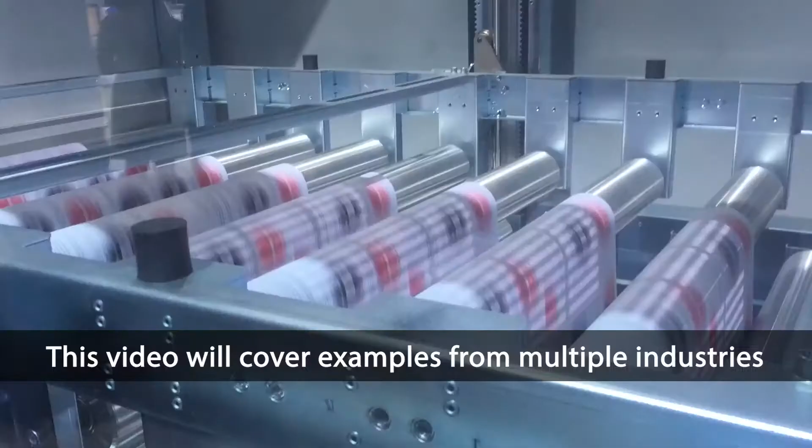This video focuses specifically on the second method, changing the process, and how you can use this method to reduce or eliminate hazardous chemicals. In this video, we are going to look at a number of examples from different industries and how they change their process to reduce hazardous materials. Although these examples are tied to specific industries, we would encourage you to watch the entire video, as the examples might give you a similar idea for a waste reduction project at your facility.

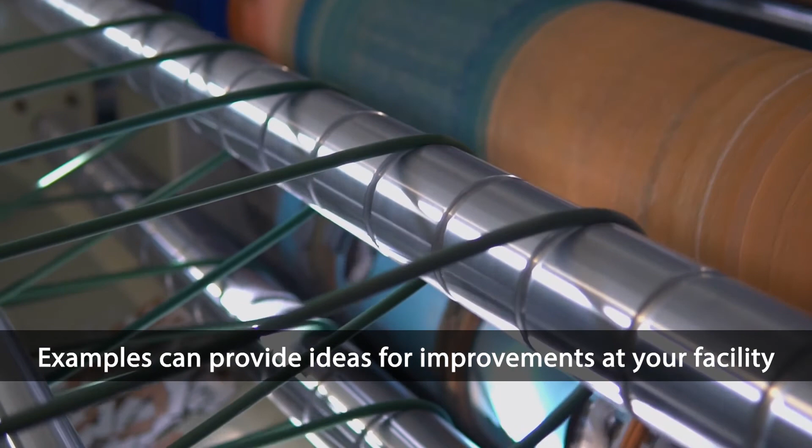Examples in this video include the following: two from the painting and coating industry, one about training and another about standardizing operations, an example from the printing industry where a facility moved to a heat press system, and finally an example about chemical neutralization at a water treatment facility. Alright, let's take a look at our first example.

Many companies with painting and coating operations have already begun using high-volume, low-pressure, or HVLP paint guns. This change improves paint transfer efficiency, so more of the coatings end up on the product. However, not all companies train their staff on how to properly use the HVLP paint guns. Let's take a look at how this can translate into savings.

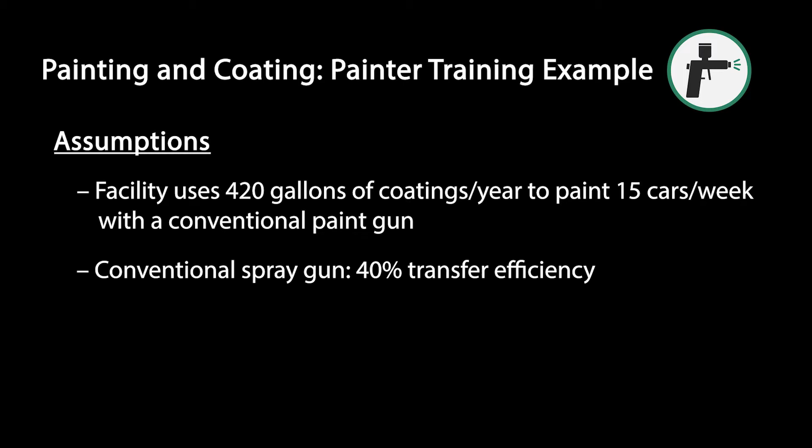In this example, a facility uses 420 gallons per year of coatings to spray approximately 15 cars per week using a conventional spray gun. A conventional spray gun has a typical transfer efficiency of 40%. The company decides to switch to HVLP spray guns, which increases the transfer efficiency from 40 to 49%.

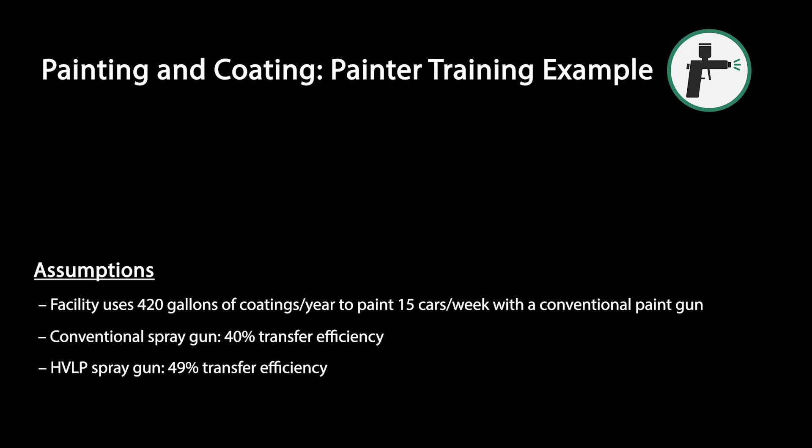First, we'll move our assumptions to the bottom of the screen. As we work through these calculations, feel free to pause the video as needed to make sure you understand them. You may even want to get out a pen and paper and run through the numbers yourself. If we multiply 420 gallons used per year by the 40% transfer efficiency, we see that only 168 of the 420 gallons is actually transferred and ends up on the cars.

Assuming then that 168 gallons is what is needed to paint the cars, we next want to determine how many gallons we would need if we used the HVLP paint gun. We'll use the same equation, except now our transfer efficiency is 49%, and we know how much paint transfers to the cars, 168 gallons. If we divide both sides by 49%, or 0.49, we find that only 343 gallons are needed with an HVLP paint gun. That's a savings of 77 gallons per year. At a cost of $90 per gallon, this represents an annual cost savings of $6,930.

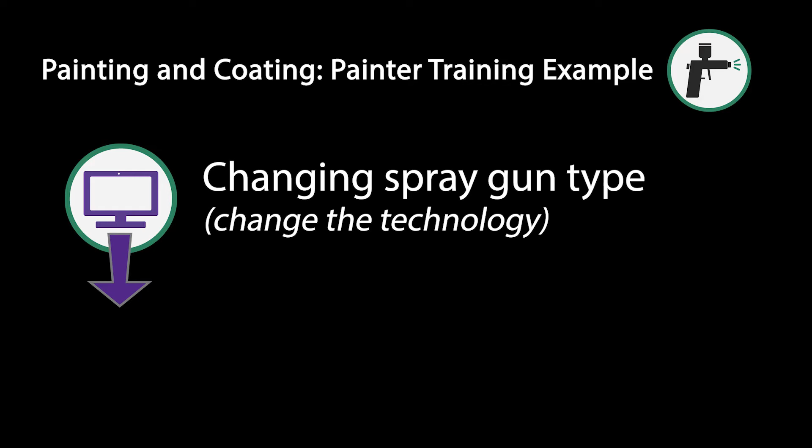Now, changing out the type of paint guns was an example of how we can change the technology. The facility decides to take this project a step further and change the process by training its workers on how to properly use the new HVLP spray guns, which further improves the transfer efficiency to 61%. We'll add that to our list of assumptions.

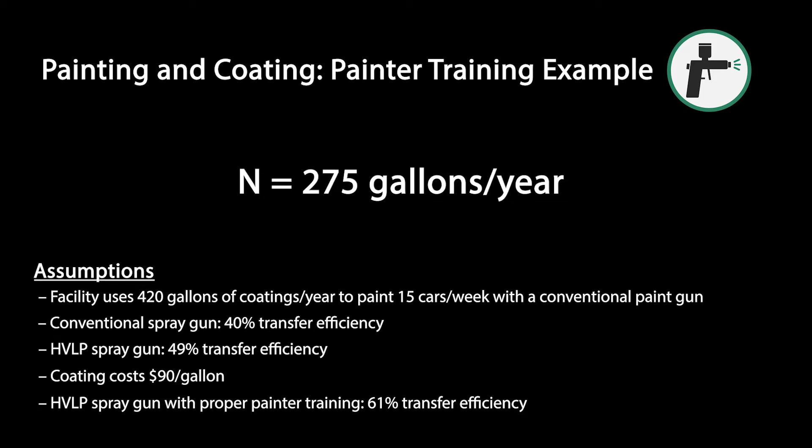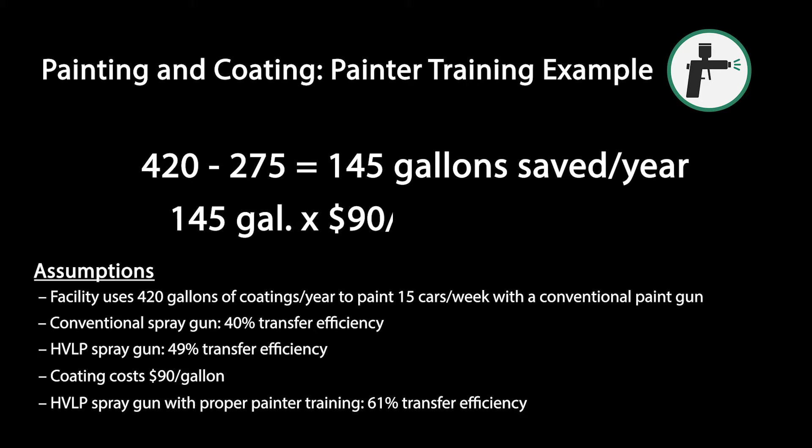Using the same method and equations just shown with the conventional and HVLP spray guns, we find the facility now only needs 275 gallons per year. This ends up being a total savings compared to the conventional gun of 145 gallons of coatings and $13,050 per year. This is a great example of how a facility can do more than just one of the waste reduction methods we discussed earlier. Here, we combine changing the technology with changing the process to achieve significant savings. This example also shows how businesses can continue to make step-by-step improvements to their operations.

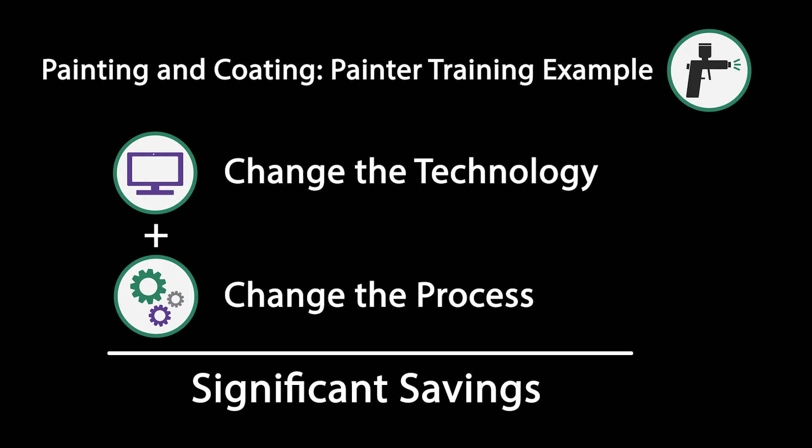Here's another example from the painting and coating industry. This facility had a pollution prevention intern assist with identifying opportunities for waste reduction. This intern began researching the company's painting operation, which is used to paint approximately 200 modular buildings per year. Each building requires 2 to 3 coatings, which includes a primer, intermediate, and final cover.

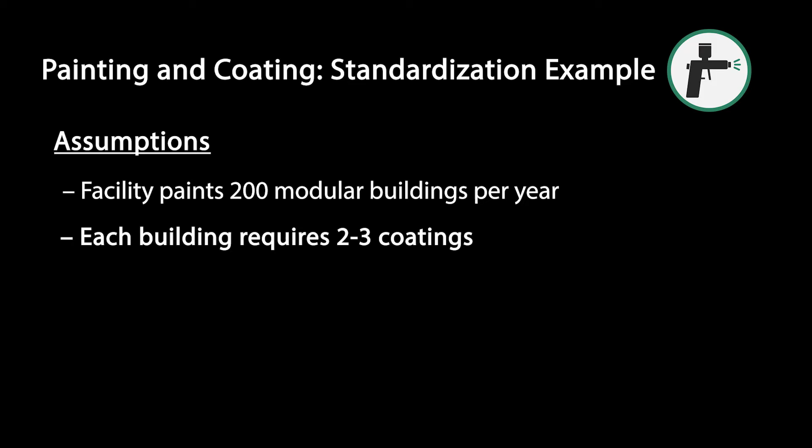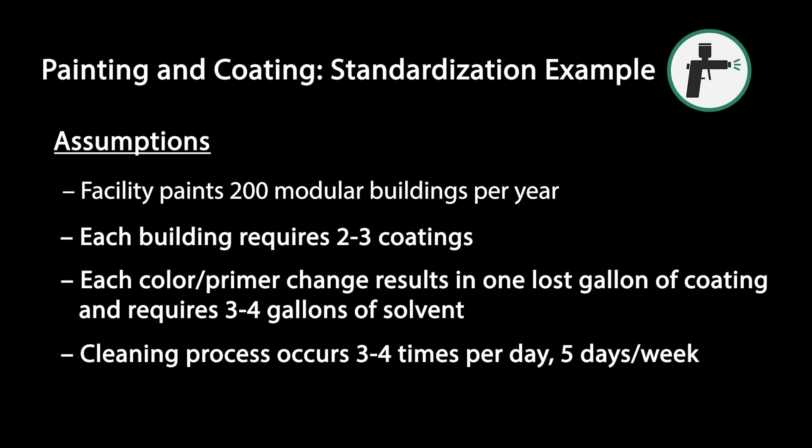Each time the paint lines were cleaned out for a color or primer change, approximately 1 gallon of coating was lost, while 3 to 4 gallons of solvent were required to clean the paint lines and guns. This cleaning process was occurring 3 to 4 times per day, 5 days per week. By standardizing the process and using primarily the same type of primer for each job, rather than giving clients the option, the intern found it was possible to save 1 gallon of paint and 3 to 4 gallons of solvent per building.

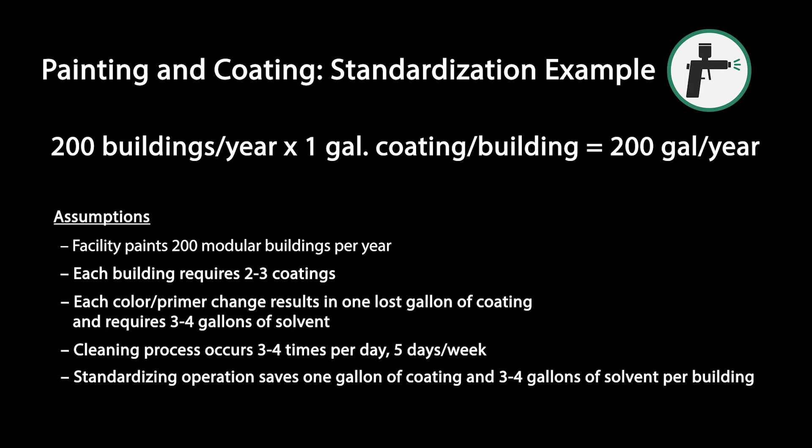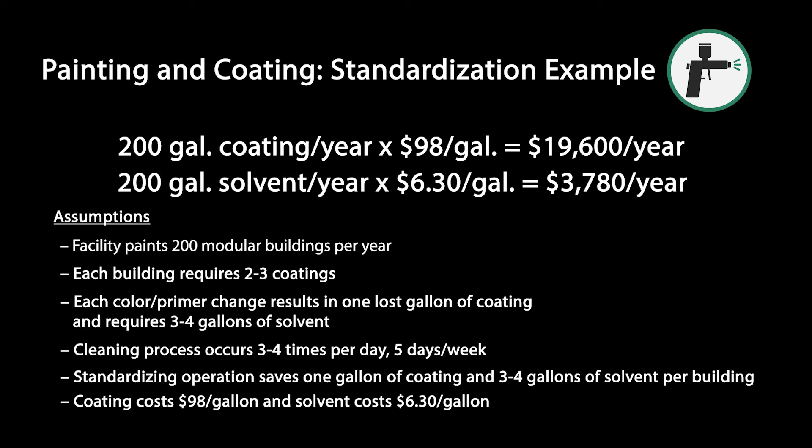This process change resulted in an annual reduction of 200 gallons of carbozinc paint and approximately 600 gallons of methyl ethyl ketone solvent. At a cost of $98 per gallon for the primer, up to $19,600 in annual savings can be realized in primer purchasing costs and $3,800 in solvent costs. It's important to note this does not include additional labor and operational savings from reducing the number of line changes.

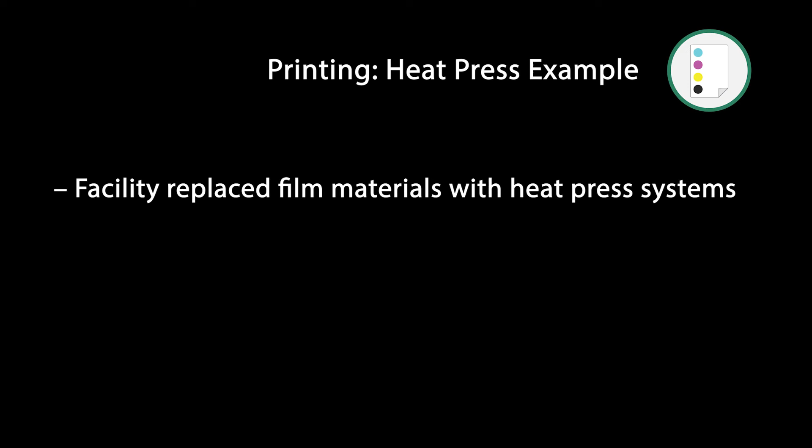A printing company was able to reduce its waste and solvent use by changing the process. Rather than use traditional, non-recyclable film materials, the facility now operates fully on heat press systems that use 100% recyclable aluminum plates. In addition to the waste reduction associated with this process change, material costs have also been reduced. The purchase of film material had cost the facility approximately $90,000 per year.

Since moving to the heat press systems, silver waste has been completely removed from the facility, and the new printing technologies have significantly reduced solvent use. This has had a positive impact on the company's purchasing cost and has also reduced the amount of hazardous waste requiring disposal.

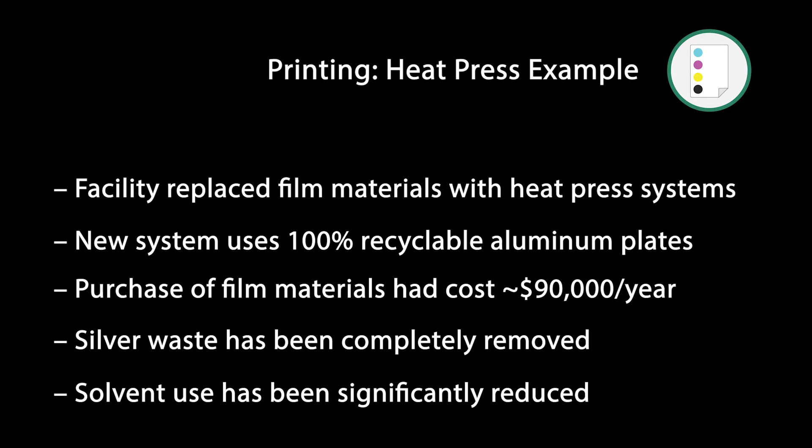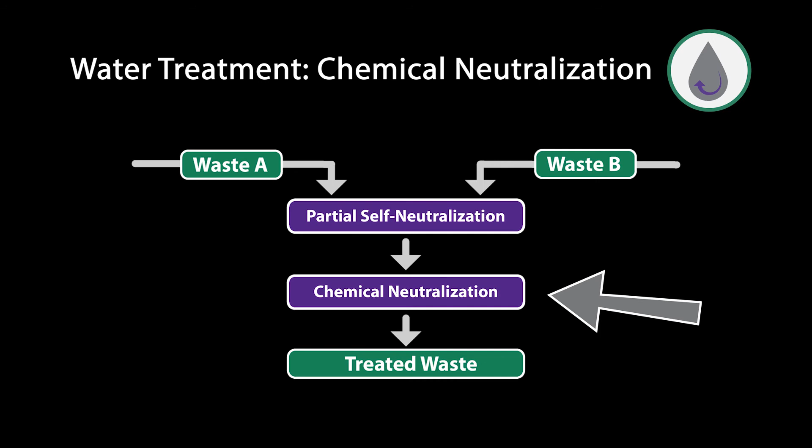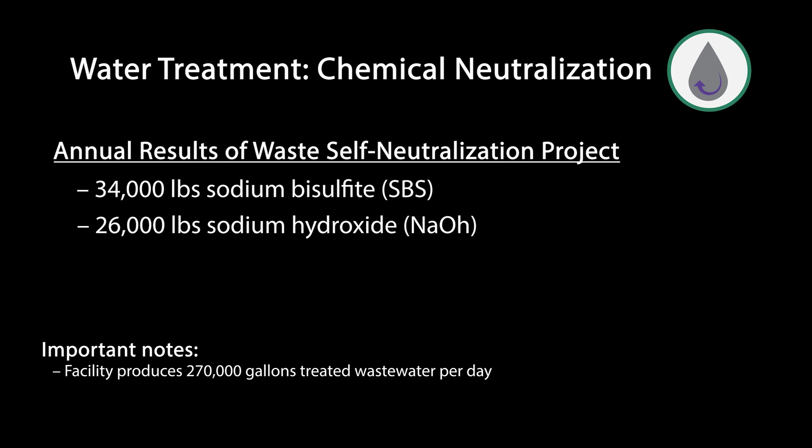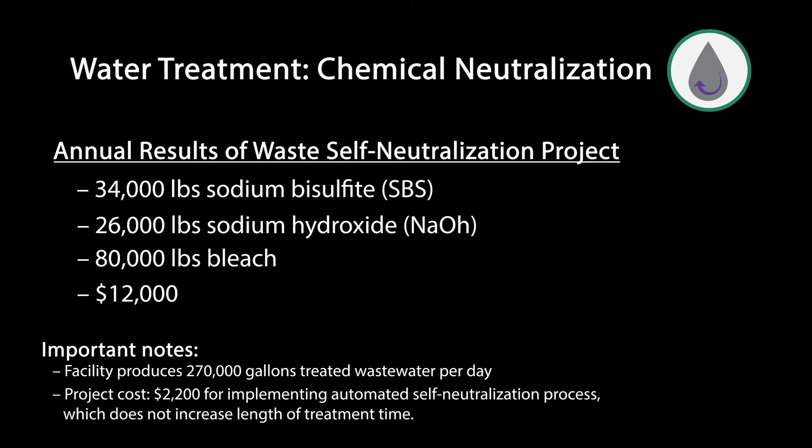For a facility producing 270,000 gallons of treated wastewater per day, the resulting annual savings were 34,000 pounds of sodium bisulfite, 26,000 pounds of sodium hydroxide solution, and 80,000 pounds of bleach, which adds up to $12,000 per year. The cost for programming this automated self-neutralization process was projected to cost $2,200 and not increase the length of treatment time.

Additional process changes identified by the intern include recalibrating pumps to prevent excess chemical additions due to pumps running faster than intended, and checking pipe orifices to ensure there are no blockages. As you can see from the examples provided, the opportunities to change the process are unlimited. Changing the process can reduce pollution, save your facility money, and improve the work environment.

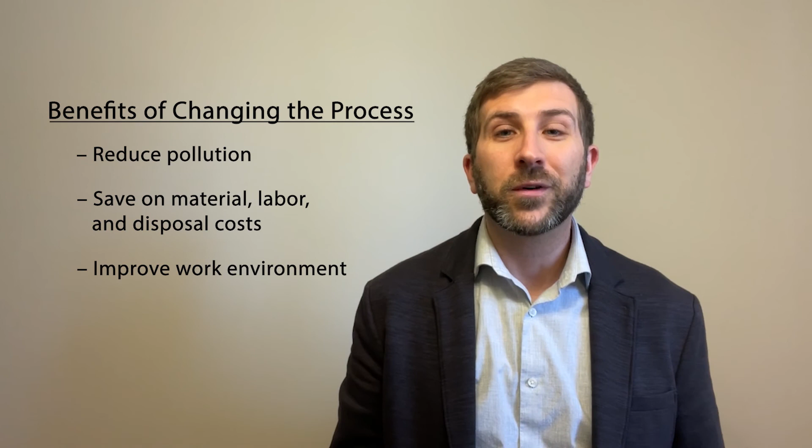Many times, it just takes looking at an existing process with a fresh set of eyes in order to get a new perspective. Make sure to involve staff across your facility and ask for their ideas. Many ideas come from unexpected places. And don't forget to track your material use and waste generation. This can be incredibly helpful in determining if and how much you are saving with the new process.